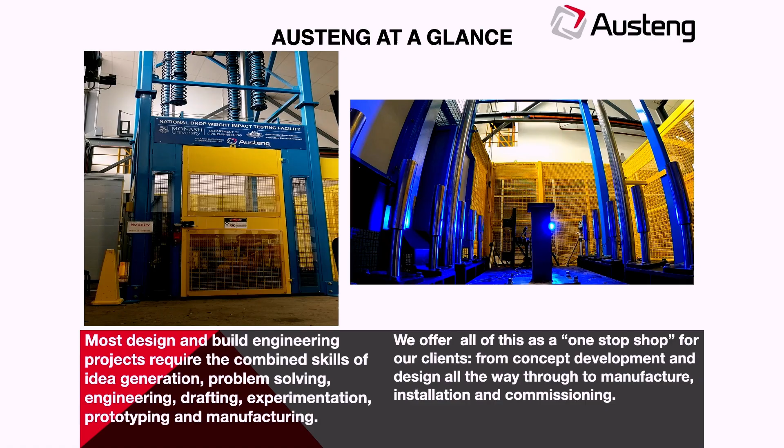Just an example of some of the stuff we do. We get customers walk in. Monash University walked in and said, "We've got funding for the National Drop Weight Impact Testing Facility. We want to throw a 1.25 tonne mass at 20 metres a second at targets we're researching." And that was our design brief. So look at the left-hand one. They've got high-speed cameras, and they might spend a day building targets. But that's the sort of stuff we do. Someone walks in and says, we've got this thing, and we'll design it, engineer it, build it, make it. I won't bother showing that next one.

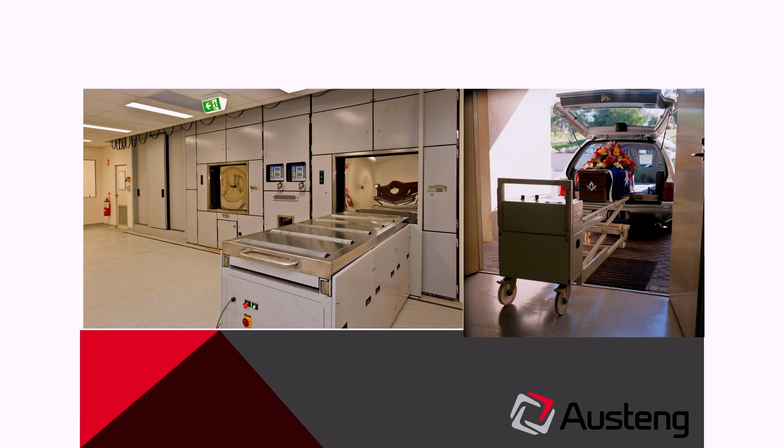We've worked in this industry since the late 80s, so we do cremators, charging biers, coffin trolleys, catafalques, ash processors, grave shoring, grave safety fences, transfer vans, precast burial systems, whatever the industry comes up with. Catafalques, transfer vans, shutter handling. Okay, that's just the context.

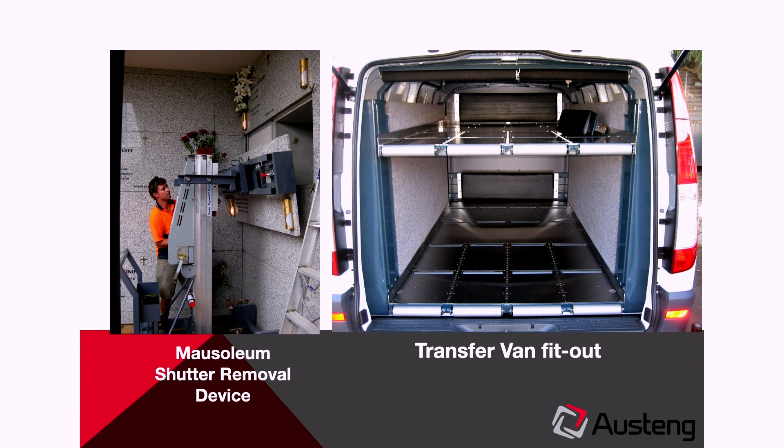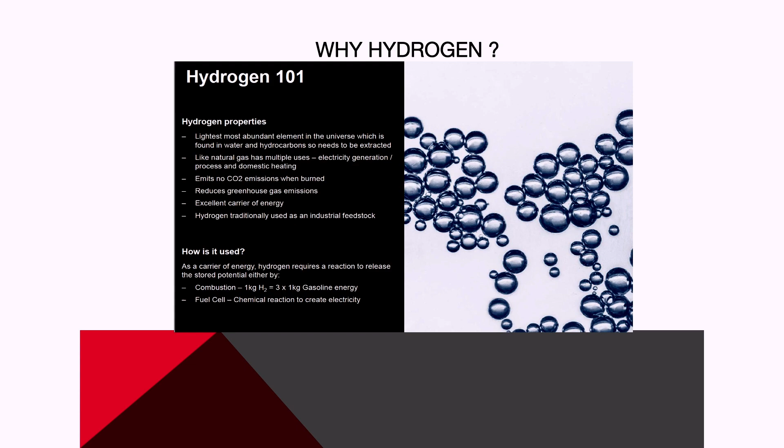The three whys. Why hydrogen? Why are we doing this? And why you should think about doing this. So why hydrogen? Hydrogen is the most abundant element, and it's easy to produce. There are alternative fuel gases you could use, and by no means do I think hydrogen will be the only one. But hydrogen is abundant. It's easy to produce because it's, inverted commas, just electrolysing water. We've got plenty of water. We've got plenty of power to do it. We can do it in an environmentally sustainable way. And it's a very energy dense fuel.

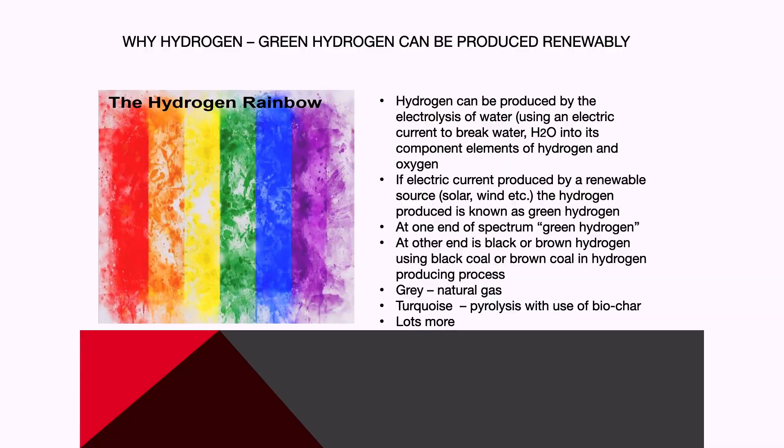You can see on the very bottom there, 1 kilogram of hydrogen combusted is the equivalent of 3 kilograms of petrol. So it's very energy dense in terms of mass. It's not quite so energy dense in terms of volume. Hydrogen can be produced renewably as well. So electrolysis of water, and if you're using renewable energy for that, you can then put your hand on your heart and say, yes, it is green. There are other ways of doing it. Another one that we're working on is this second bottom one, which is pyrolysis; the gas that comes from that is hydrogen-rich, and you can extract the hydrogen from it. There are other ways that are less environmentally friendly.

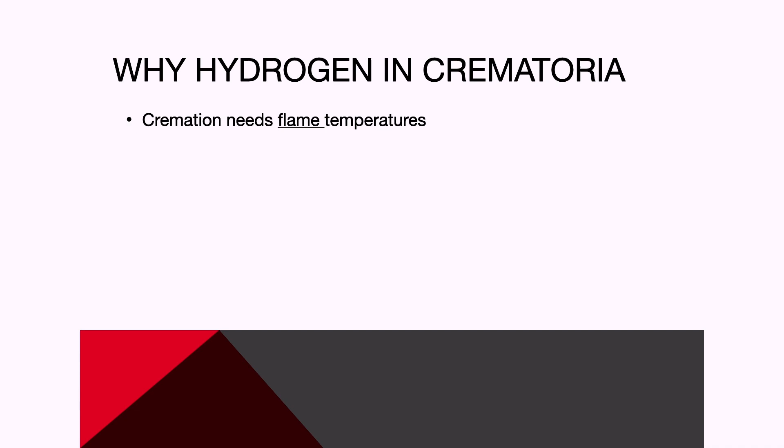Why hydrogen in crematoria? Cremation needs flame temperatures, 800, 900, 1,000 degrees. Electrical resistance elements don't cut the mustard at that. Electric resistance elements, 600, 650, maybe 700, will see you out. Someone will say, but there are electric cremators, and there are, and what they do is heat them up as high as they can, and they're basically using the first couple of cremations to get the rest of that temperature, and then you need them to run 24 hours a day. So for cremation and a whole lot of other applications, we need flame temperatures. So we need some form of gas to put in our burners.

Plasma technology is an option, and certainly our licensor did some work in plasma years ago. The problem with plasma is the temperatures are that high that you actually don't get any cremated remains out of them. The technology is that good that the calcium actually goes up in smoke as well. Both electric options use a lot of power, and they use a lot of power instantaneously. The electric cremators that I've seen, you literally had to ring up the power station and say, well, I was turning on my cremator to heat it up.

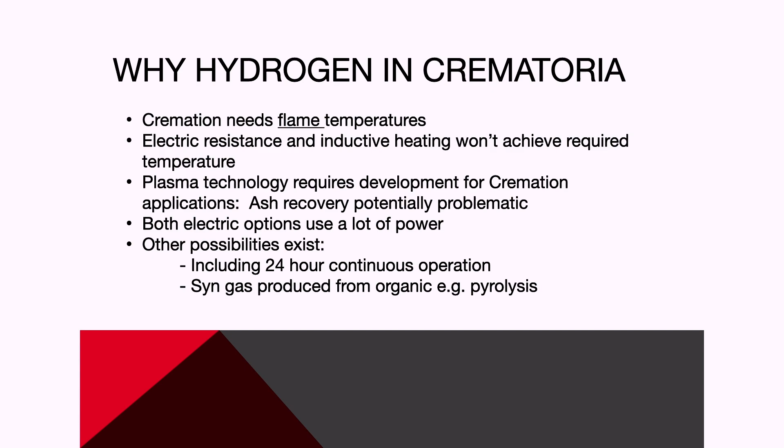The hydrogen option or a gas option allows you to actually store energy, so you can have a modest electrical supply and store your energy in the form of hydrogen. There are other possibilities. So hydrogen is not the only answer, but it is one answer, and I think it's looking like a pretty good answer. And some of the other possibilities there, well, I've mentioned 24-hour operation and syngas produced from organics.

Okay, why are we doing this? And for me, that's pretty important. There is no doubt that what we're doing at the minute is damaging. I've got enough grey hair, and we've got kids. We hope to get grandkids. So that's really important. As I said, the phone started ringing for us, and I'm guessing the phone's going to start ringing for you guys. So we get pushed from our customers, and our customers are getting pushed from their consumers.

The federal government's now got a 2050 target. The state government's got a 2030 target, and historically speaking, the low-hanging fruit for governments to meet their targets is their own departments and their own organisations that they've got control of, which are you guys. So it seems to me that it's highly likely that you guys are going to get pressure, and the impression I've got from talking to a couple of people is that pressure's already started.

Our prediction is that the governments will legislate, and we're already getting customers outside this sector, in tender documents, saying to us, what are your green credentials, Austeng? And I think that'll be indicative of what's going to happen down the track. So that's why we're doing it.

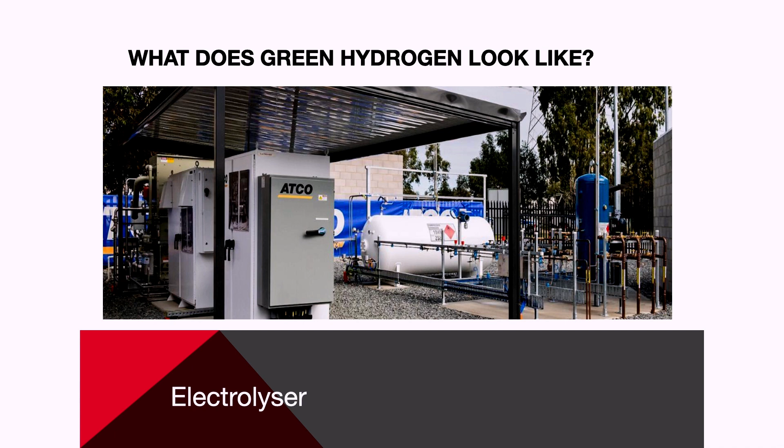And there are different designs of electrolyzers, and different technologies. They're basically in a shipping container. You bring in your shipping container, connect your leads up to it, and if you're buying green electricity, or you've got solar, or you've got both, you've then got clean, green, renewable hydrogen.

The electrolysing on site is I think a good idea, because you're then not moving hydrogen around. You're not spending a heap of energy compressing the hydrogen, driving it around, and then depressurising it. If you produce your hydrogen on site, if you've got an electrolyser and you're plugged into green electricity, you can literally say, I'm going to start up my cremation furnaces at 9 o'clock, and you turn on your electrolyser at 8:30, you've just built up a bit of a buffer, and away you go.

If you've got a solar installation, you might want enough storage for a couple of days. But if it's not much storage, and your usage patterns, you know, everyone here cremates during the day. The sun shines during the day, so there's a really nice match between producing it renewably on site and your usage patterns.

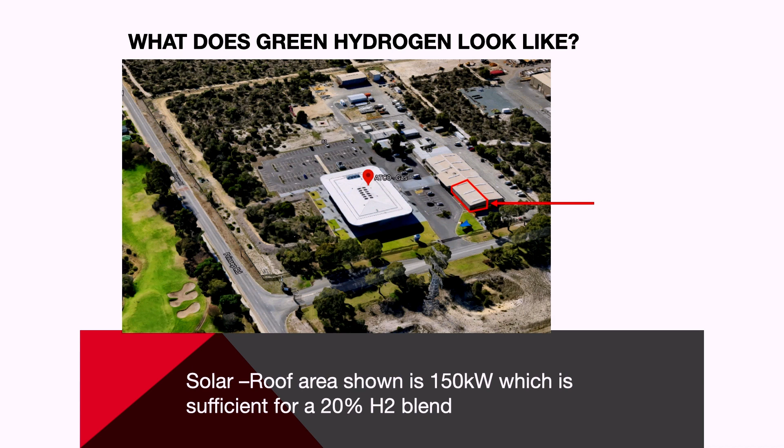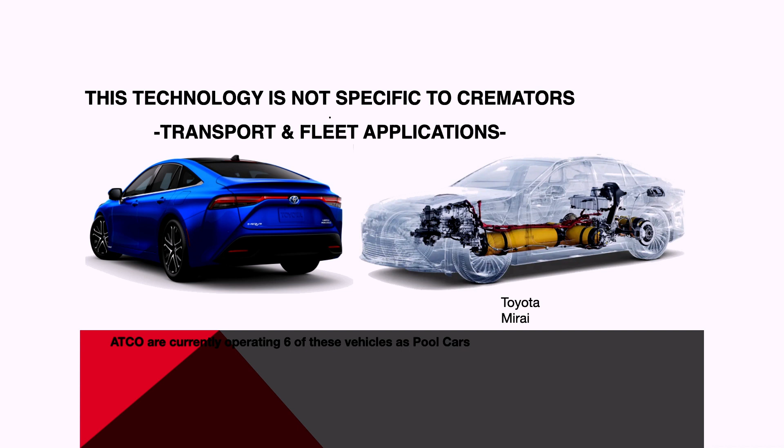Yeah, this particular site actually uses their hydrogen, and they've got a fleet of 6 Toyota Mirais, and these Toyota Mirais are a hydrogen fuel cell car, got a range of about 500 kilometres. They go like shit out of Shanghai. Fantastic.

And so they run all their fleet cars on hydrogen, and 150 kilowatts was enough to run their cars. So this is not only applicable to cremation. Once you set up this, you can then roll it out across your business. There are, I understand, and I think it's JCB, but don't quote me, that are already starting to trial excavators running on hydrogen. Yep. Okay.

So. And again, the burner technology is not that hard. There's a whole lot of companies now, people that supply gas valves and regulators and pressure switches and burner nozzles and all that sort of stuff. A lot of stuff we buy is from Europe. They've done all that work. You can actually pick up a catalogue and they'll say this particular valve is approved for hydrogen. That's what it looks like.

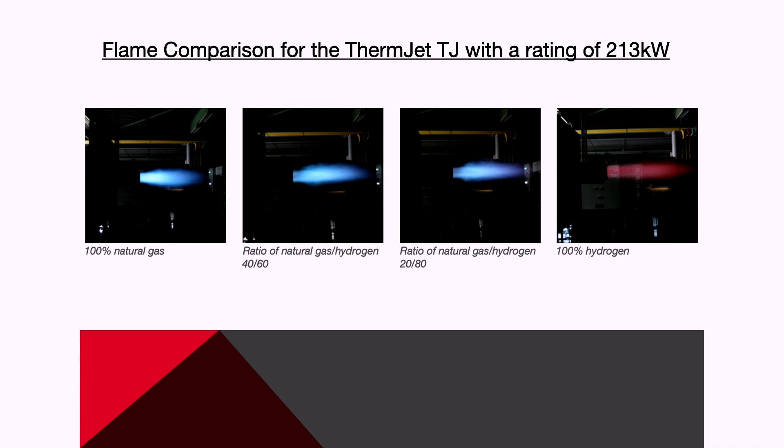100% natural gas. And then increasing ratios up to 100% hydrogen, similar flame lengths, slightly different flame speeds, but again, from an engineering point of view, that's a matter of us tweaking.

Okay, all right. So we've been lucky enough. Lynette did a great job finding a DELWP grant for, and what was it about, Net? It was for demonstrating the use of hydrogen or something like that. So we put in a grant submission, Ashes to Ashes hydrogen for cremation, and DELWP loved it, and we got a grant. So this grant, amongst other things, is us putting up a demo burner running on hydrogen.

So we're going to get some gas bottles, pipes, valves. We're talking with ESV, Energy Safe Victoria, about approvals. There's not legislation in Victoria written about it. They've come down and seen us and said, we want to work with you to make this work, and they'll review our submission, they'll bless our submission, so we'll get regulatory approval for it. So we're not doing it behind closed doors.

And the idea of the regulatory approval is we can then roll it out, and that's part of the grant that we're getting. But then part of the grant is sharing the knowledge, which is part of what we're trying to do today. So we're actually going to set up a demo burner to demystify the whole enchilada. So anyone here can come down, bring your boards down, and say this is what it looks like. That's the gas bottle, that's the pipes, that's the button you press, and you get a flame out there, and away you go. We're doing it.

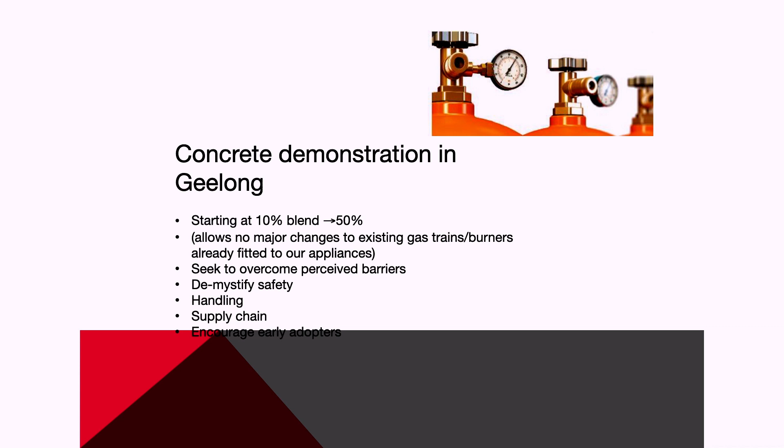There's already been trials done in Adelaide, I think in Tonsley, where they've actually got a little neighbourhood. They've put 10% hydrogen into the blend, and this is for domestic appliances. And they took surveys. 10% hydrogen seems to be a bit of a no-brainer. What we want to demonstrate and show is we can push that up. We want to find out how far we can go with our existing gas trains, and then what changes we need to make to our gas trains to go further.

Obviously, some of the resistance, there's not even resistance, some of the hesitation by our customers is they're going, what does this look like? What's our business interruption risk? And again, what we're going to do is show that, and we're also going to show that if the hydrogen truck doesn't turn up, or the electrolyser breaks down, or one of 50 things, that you will have no business interruption. You'll still be able to run on natural gas.

We'll show that at the demo. We'll run it on hydrogen. We'll turn off the hydrogen. The burner will keep running. And obviously, by doing this, we're going to encourage a supply chain, and we want to encourage early adopters. So what does it possibly look like?

So we think the low-hanging fruit is to convert your existing equipment, or if existing equipment's up for replacement, new equipment, to run on a blend of hydrogen and gas. Right? That's the low-hanging fruit. Then you set up your supply chain. Now, buying green hydrogen and bringing it in on a truck is a possibility. Initially, it might even be buying hydrogen that's not green just to get started.

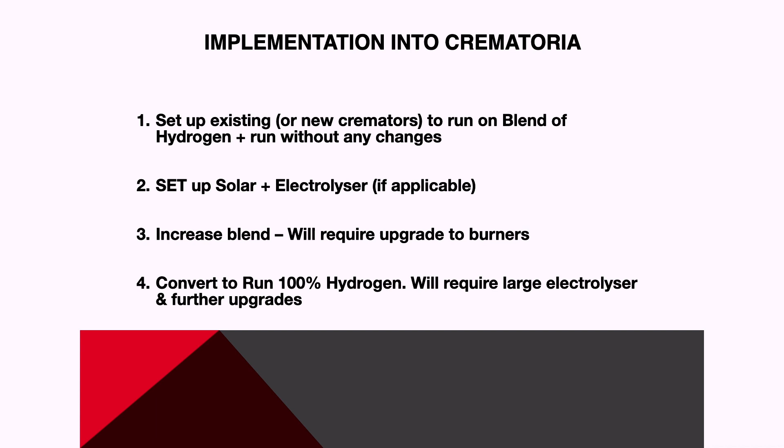Where we're up to at the minute, we've got this grant. One of the conditions of the grant, and this shows you how seriously the government's taking it, was we have to have this finished by 30 June. They've been a bit late delaying, but we'll get an extension, and it won't go any further than August or September. So we've got to have this running. So this, all going well, will be actually ready to roll out by the end of the year. So that's the end of the hydrogen.

I just wanted to quickly talk about one other very high carbon footprint, which I've been approached about by a couple of trusts already and other customers, and that's concrete. Concrete is probably your biggest CO2 emitter, and there's a whole lot of really good work being done on reducing that. And John at the back's done some fantastic work in that space, but it still has a footprint.

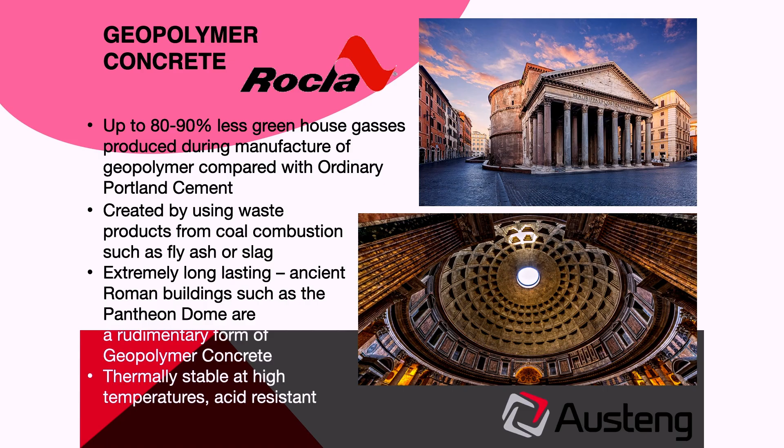The other technology we're working with is with Rocla, and this is geopolymer. So this technology's got no cement anywhere near it. The actual binder system is in our chemistry, and there's different forms of chemistry. In our chemistry it's fly ash and caustic. So it's still sand and stone, although we want to do some work on replacing sand with recycled glass. But it's using waste product.

It's got an incredibly small greenhouse footprint, so you don't eliminate your footprint completely because there's still some embedded energy in crushing stone and this sort of thing. But it's an incredibly small footprint. It's a very well-known technology, as the slide says there. The Romans used it

2,000 years ago. Their source of aluminosilicate was a different source, it was clay, and this product's acid resistant, salt resistant, caustic resistant, thermally stable at 700 degrees. So in some engineering senses, it's got better properties than concrete, and it's got an incredibly small greenhouse footprint. That's the key.

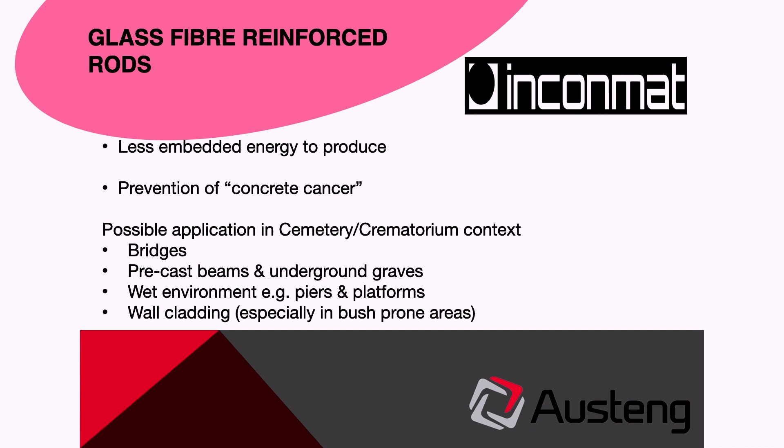Our technology, we're using glass fibre rods instead of steel, and the glass fibre rods have actually got, again, less embedded energy, but the big thing is that they're completely immune to concrete cancer. They don't rust. And we've just recently completed a project for the City of Greater Geelong, so 2 pedestrian bridges. Their requirement was 100 years maintenance free, so they don't have to be painted, scrubbed, washed, anything.

They're thermally stable at 750 degrees. The previous bridges were timber bridges, and the vandals actually burnt them. The vandals can come along here and light a fire under that and it'll be pristine. So this is another option for reducing your greenhouse footprint as well. And those two combined, and the third one would be transport, but those two combined would make up the bulk of your CO2. The transport, obviously, you can address partly by hydrogen and obviously partly by EVs.

So the solutions, I'm an engineer. The solutions are there. We've just got to implement them, which we're doing at Austeng. We're virtually electrically completely neutral now, and we've now got 4 vehicles that are electric. So we're going down that journey pretty rapidly to show that it can be done. So yeah, I'm on a bit of a soapbox as well. But the thing with the engineering, the reason I started out with that, is that the engineering's out there and it can be done and it can be implemented pretty quickly if you want to. So any questions? That was a pretty quick run through given we had a late start.